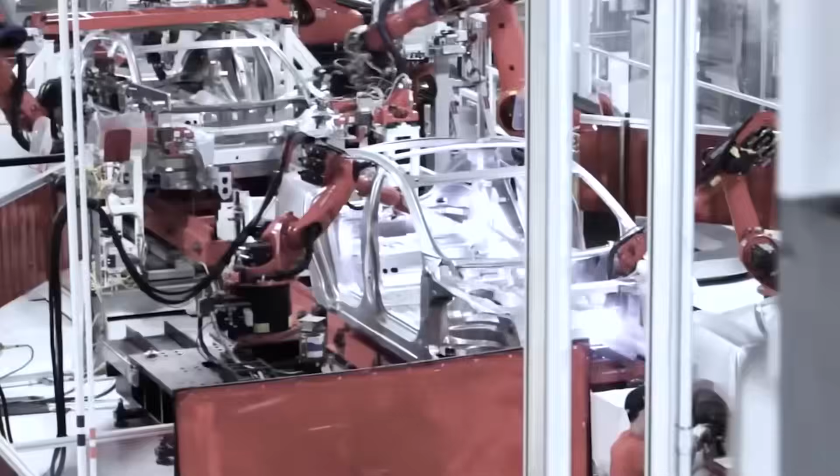It's tough to impress people with a robot. They're already among us, working in factories, saving people in emergencies, defusing bombs, driving cars, helping around the house, and much more.

But what did it look like a few hundred years ago? Yes, back then there were also some kinds of robots, mechanical devices resembling a human or an animal. They played musical instruments, wrote with a quill, danced, roared, and performed other actions that could shock an ordinary person.

Today we're talking about mechanical monks, programmable writing boys, a robot that beat Napoleon Bonaparte and Benjamin Franklin at chess, and other wonders from bygone eras.

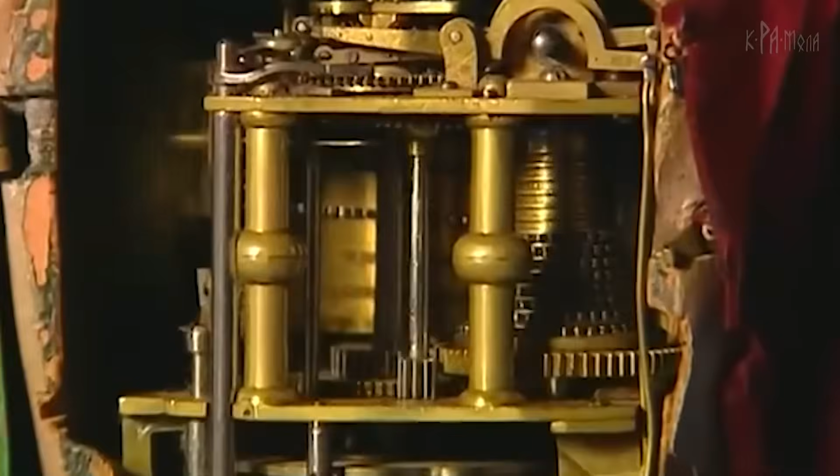In the 18th century, humanity probably began to feel like the master of nature for the first time. One after another, the laws of physics, chemistry, and biology yielded to inquisitive minds, and the forces of water and air were conquered. Everyone thought that just a little more progress, and man would be able, like God, to change the properties of matter and turn the inanimate into the living.

These ideas gave rise to a fashion for automatons, mechanical imitations of humans and animals, capable of mimicking various actions, playing musical instruments, dancing, writing, and drawing. Of course, the range of movements was strictly limited by their design, and it was almost impossible to reprogram the automatons. In any case, it was easier to build a new one.

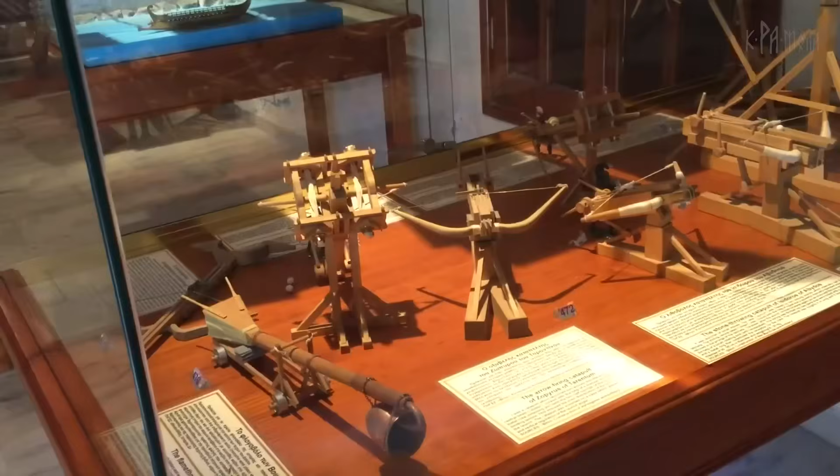Various stories about humanoid robots existed even in ancient Greece, for example, moving statues. But a much simpler mechanism described by Philon of Byzantium, who died in 220 before Christ, looks much more realistic. In the book Pneumatics, he described a device in the form of a woman who held a jug of wine in one hand, and when commanded, by placing a glass in her other hand, she would pour the wine.

King of Spain Felipe II, in 1560, ordered engineer Juanelo Turriano to create a mechanical monk. The monk could cross himself, lift a crucifix, move his lips, as if he was praying for the king. The figure moved on wheels, but for realism, it also had legs that could be seen under the robe.

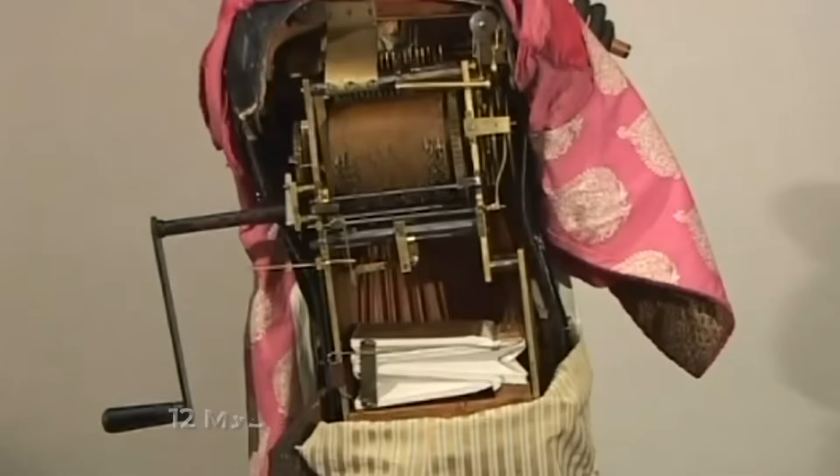In 1737, French inventor Jacques de Vaucanson built a flutist whose repertoire included 12 musical compositions. The holes on the flute were covered in the correct sequence by mechanical fingers, since wooden fingers could not fit tightly against the flute. The craftsman used real human skin.

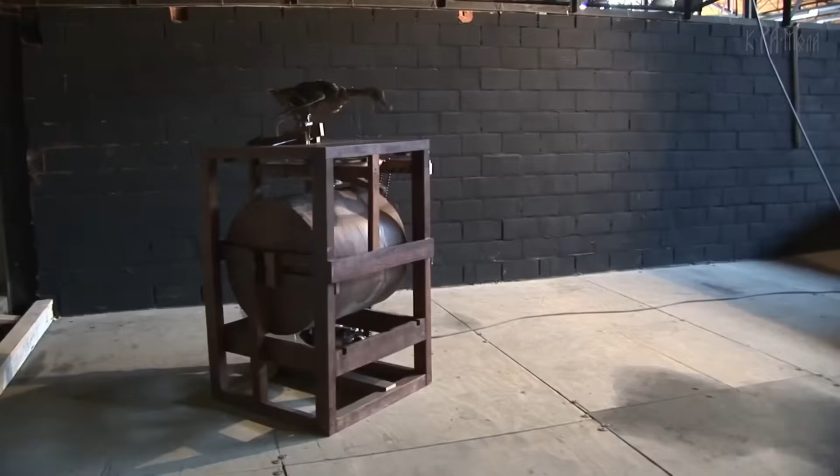Later, Vaucanson designed and assembled a duck from 400 parts, which flapped its wings, ate, digested grain, stirred it, and then defecated. The most important component for building automatons was the eccentric, a disc, or a sector of a disc, mounted on a rotating shaft so that its axis does not coincide with the axis of rotation of the shaft.

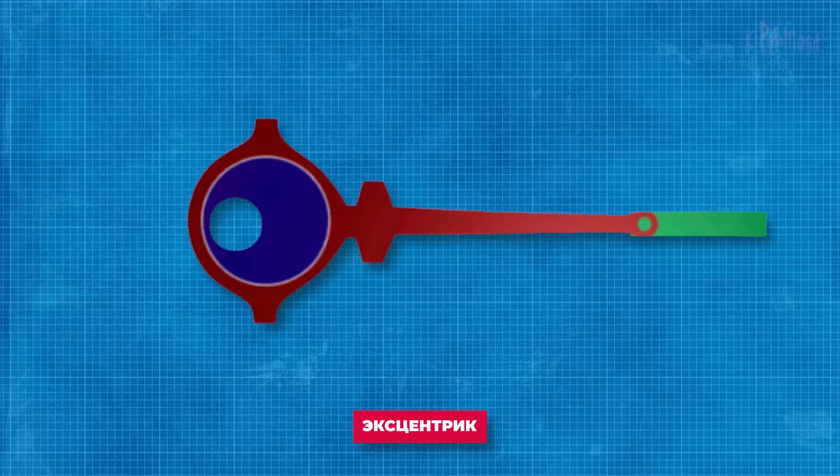This way, rotational motion becomes linear motion. Of course, you can't talk about delicate work without mentioning the Japanese.

This doll is set in motion by strings connected to a mechanism similar to a clockwork. The eccentrics tighten and release the strings, making the doll perform various actions. This doll doesn't just move its arms. It picks up an arrow, draws the bowstring, and releases it. Then it takes a new arrow from the platform, which has changed position during the shot. Meanwhile, the archer artistically moves his head.

In the 1740s, Archbishop Jakob von Dietrichstein built an automaton that was a theater with 200 figures on a single stage, all working at the same time. This is how he depicted the life of an ideal city. Coopers seal barrels, a bull is killed with a hammer. Builders lift planks onto buildings, while the aristocracy watches the common people's hard labor from above.

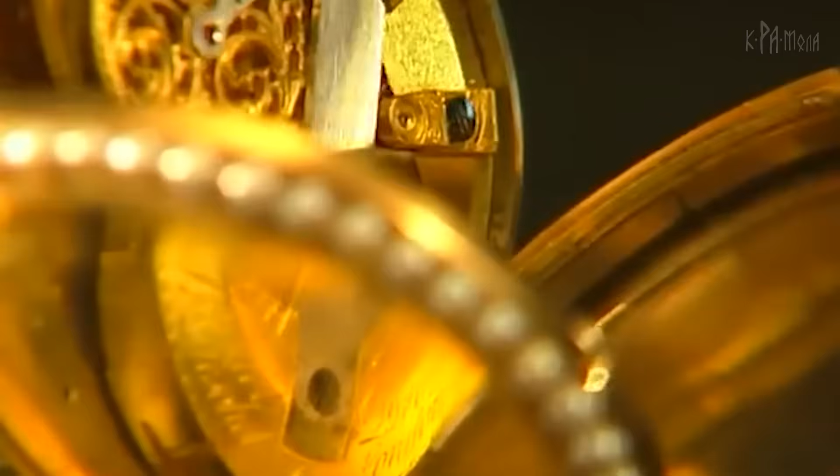Water in the mechanism turns a wheel, which, through several gears, transfers rotation to a drum. The drum contains instructions for each character. In this theater, automatons are closely connected with the art of clockmaking. As you can notice, it was almost always masters of this field who developed moving dolls.

Many tower clocks with figures performing actions have been built around the world. For example, these are Prague's astronomical clocks. They were installed in 1410 and are the oldest working astronomical clocks. In the 17th century, moving figures were added to them: Death, a skeleton with a bell, and a crowing golden rooster.

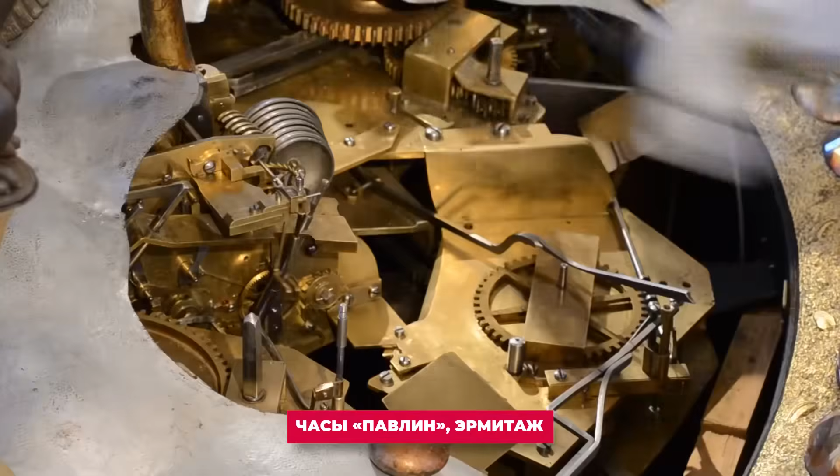The most famous automaton in Russia is the peacock clock, displayed in the Hermitage in St. Petersburg. The clock was made in Great Britain in the 1770s. Every Wednesday, the head of the Clock and Musical Mechanisms Laboratory at the State Hermitage, Mikhail Guriev, winds them up, after which the clock runs for 8 hours.

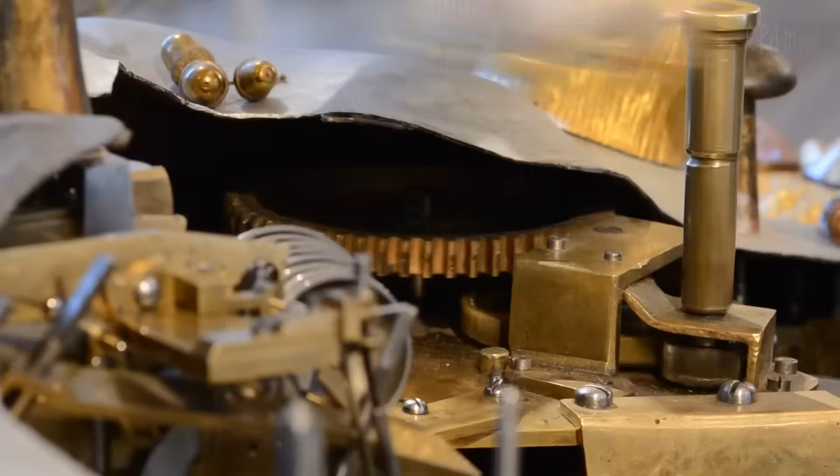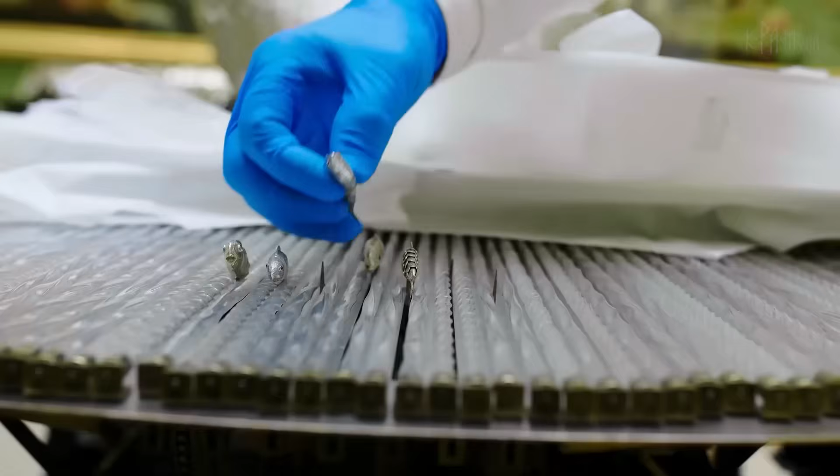Another interesting work of his was a silver swan with a long, flexible neck, searching for food in a silver pond with fish. It runs for 40 seconds at a time, and during that period it seems almost alive, catching and eating a fish while working. Even the water looks real. It is made from rotating glass cylinders with notches of various shapes.

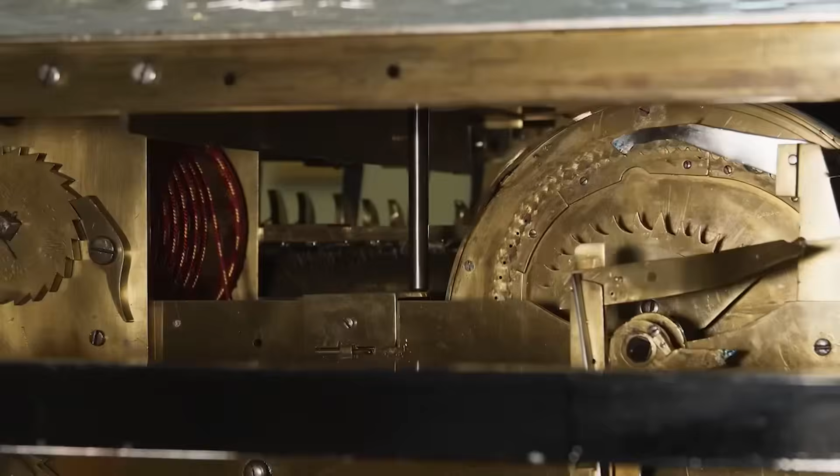In the 18th and 19th centuries, automatons were a form of entertainment for the wealthiest members of society. But these works of art were actually made by much poorer people, craftsmen who produced the components and watchmakers who assembled them. To make more money, they needed to sell more mechanisms and possibly lower the price.

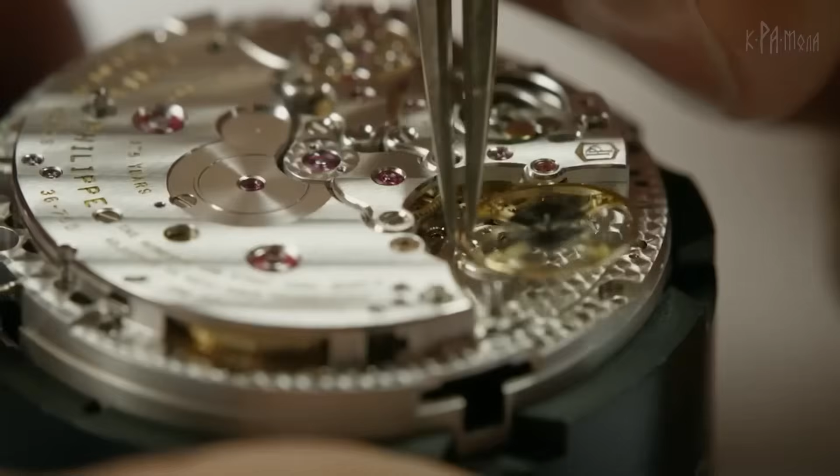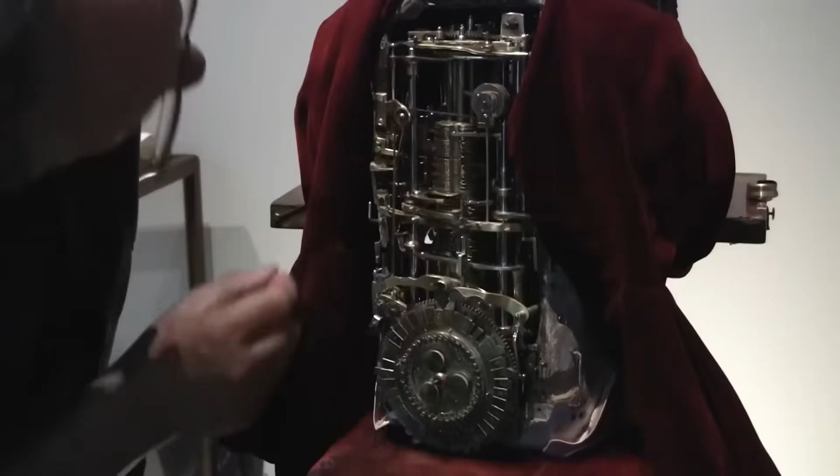The trend toward miniaturizing devices began as early as 300 years ago, with watches becoming smaller and automatons also decreasing in size. Clock mechanisms that 500 years ago took up space in towers were reduced in size to the point where their much more complex versions could fit inside a doll's body, and then into a device the size of a jewelry box. Today, one of the most impressive examples of miniaturization is the thinnest mechanical watches.

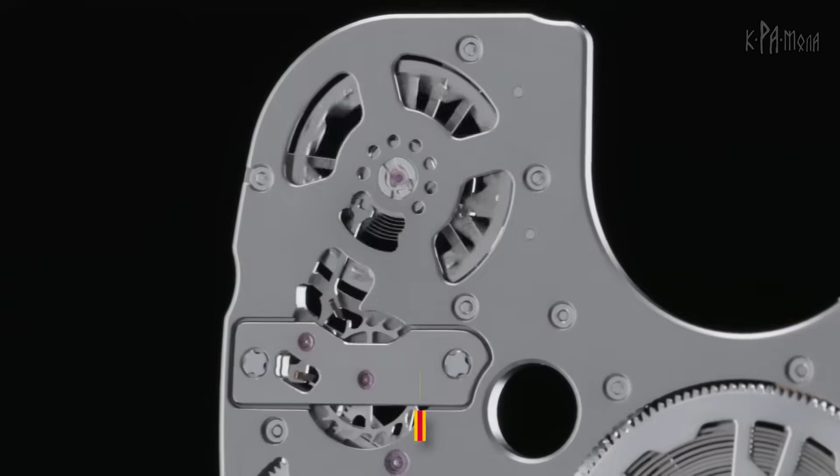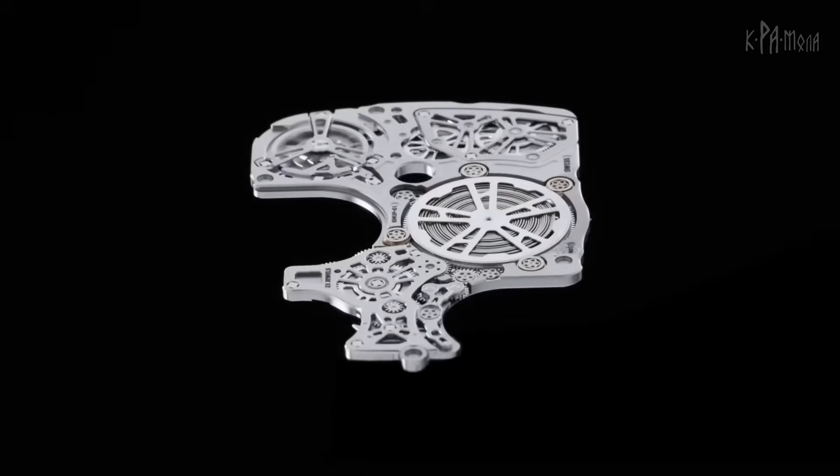Their titanium case measures just 1.75 millimeters thick, about the thickness of 2 bank cards stacked together. That's 0.05 millimeters less than the previous record holder. What else do these watches have besides the Ferrari logo? Well, at the very least, a price tag of around $2 million.

In the wild 1800s, of course, things were a bit different. An example of a miniature automaton is a bird in a cage made in the 1860s.

Another remarkable example is the jeweled laurel tree Easter egg, made by the firm of Carl Fabergé in 1911 at the request of Nicholas II. He gave it to his mother, Maria Fyodorovna. After winding the mechanism, the lid of the tree egg opens and a bird appears, turns around, and sings.

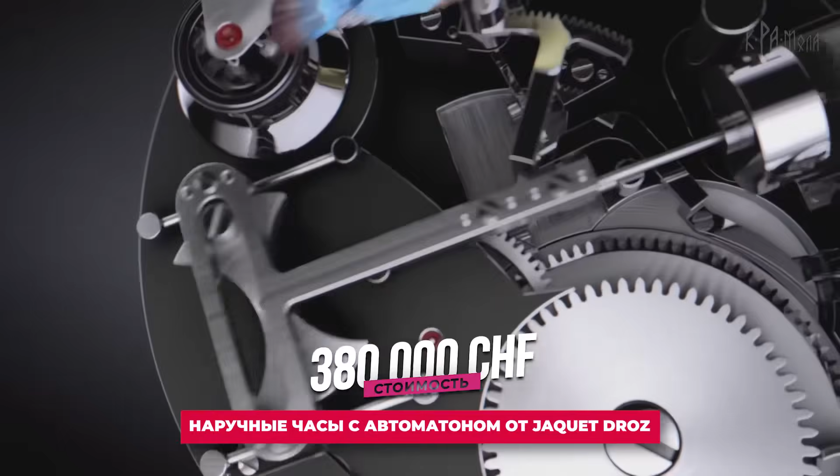By the way, the Jaquet Droz company currently offers a wristwatch with an automaton. These watches with a singing bird cost 380,000 Swiss francs, which is 25.5 million rubles. Jaquet Droz is an old luxury Swiss watch brand.

Its founder, Pierre Jaquet-Droz, became world famous for creating interior clocks and automatons, not electrical devices, but androids mimicking human and animal movements and sounds. In 1784, an automaton was created in the likeness of the Queen of France, Marie Antoinette. The doll moves its eyes, looks around, moves its head, breathes, and plays a musical instrument.

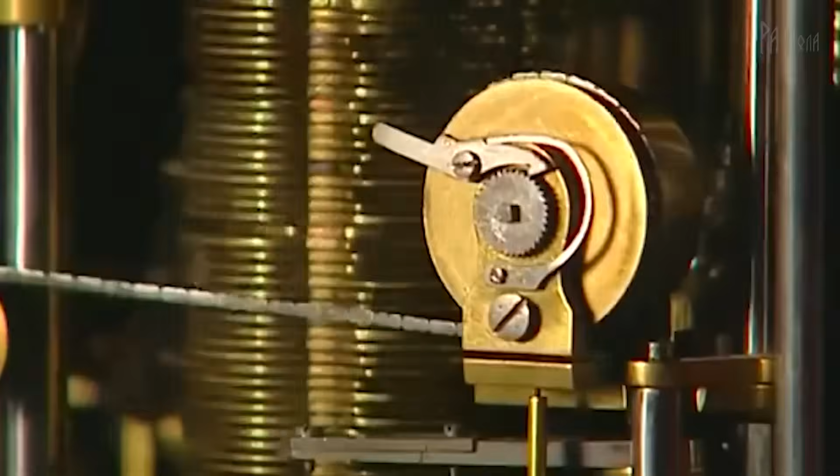The mechanism's realism is enhanced by its additional actions. He squirms in his chair, nods his head, and blows away dust. It's hard to imagine how amazed people then must have been by this robot.

A much more complex mechanism by Jaquet-Droz was called the calligrapher. The device is assembled from 6,000 parts, and the entire mechanism was placed inside the body of a doll. With a pen on paper, the boy carefully writes out the text, and after each letter, with his other hand, he moves the sheet of paper to start the next character, shakes the pen, and dips it into the inkwell. The symbols that the boy writes on the paper are encoded on a round plate in the mechanism.

This automaton is more like an automatic printing press or printer. What's amazing is that the master made it possible to change the text. The disc rotates, and the information about the symbols is transmitted sequentially to the operating mechanism.

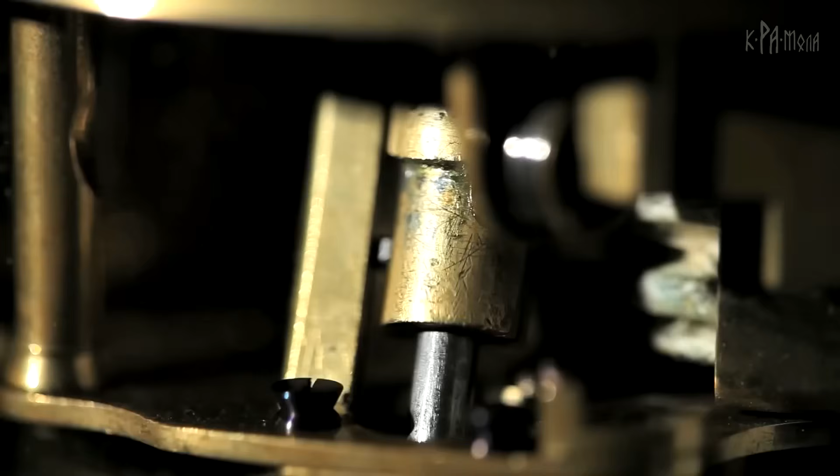Inside the doll, a stack of eccentrics converted the disc's transmitted signal into hand movements. The Swiss watch brand, created by Pierre Jaquet-Droz, still exists and makes these automatons to order, with production taking a year.

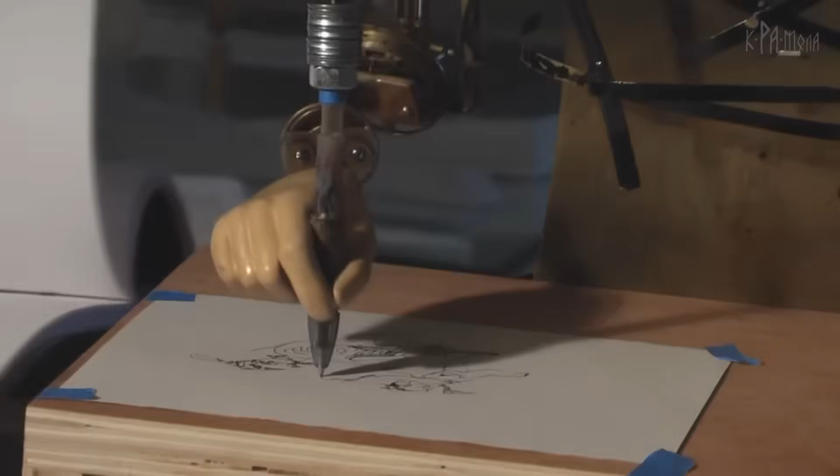In 1810, the English craftsman of Swiss origin, Henry Maillardet, built a drawing writer. He wrote poems in three languages and decorated them beautifully, and also drew images of Cupid in a garden or on the chariot of a Chinese temple ship. The result was pictures like these.

Gaston Decamps, in 1907, assembled the automaton Zulma, the snake charmer. Here we see a girl opening her eyes, breathing, turning her neck, and a moving snake, all accompanied by music.

In 1868, the American mechanic Zadoc Dederick invented the steam man, capable of pulling a load in a cab like three horses harnessed to the same carriage.

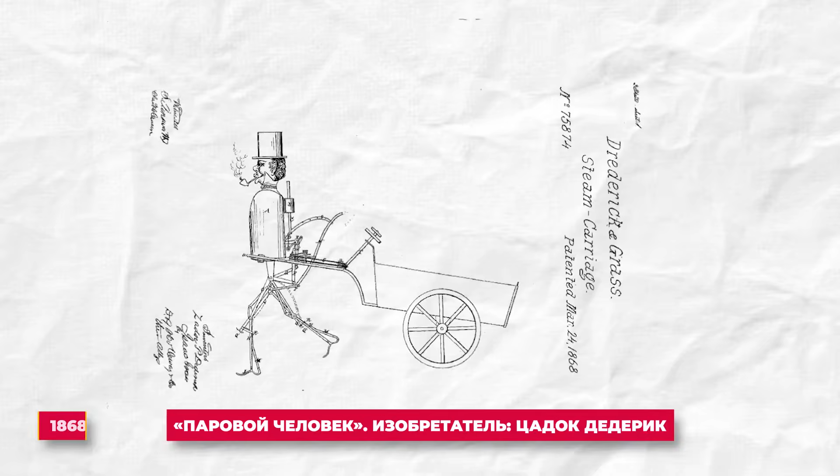Later, inspired by the steam man, the American writer Edward Ellis even wrote a science fiction novel, The Steam Man of the Prairies, in which people encounter a colossal man powered by steam in the American prairies. According to the plot, this steam man was constructed by a teenage boy who uses it to pull his carriage during various adventures.

Automatons could be used to make money not only by selling them, but also by deceiving large numbers of people. One automaton stands out from previous mechanisms, able to imitate humans, think, analyze, and make decisions.

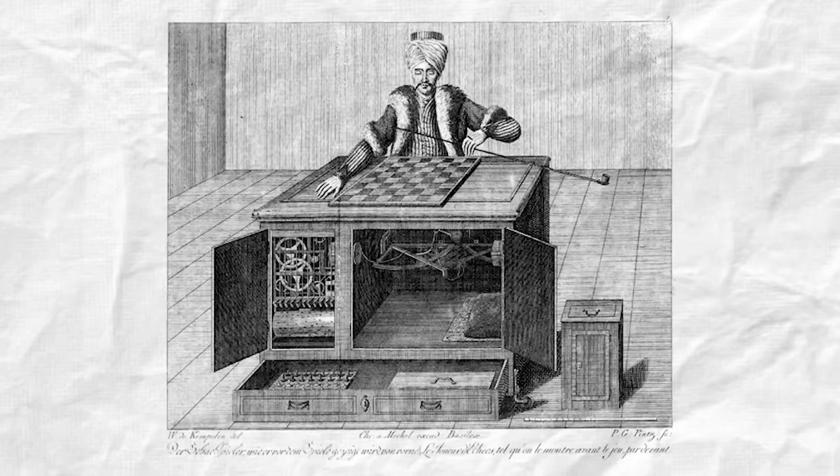This automatic chess machine was called the Mechanical Turk, created by the Hungarian inventor Wolfgang von Kempelen in the second half of the 18th century. On the outside, the machine looked like a wooden sculpture, consisting of a life-sized mannequin attached to a wooden cabinet. According to its creator, the Mechanical Turk was capable of playing chess on par with a human and even beating them. Was it possible, based on 18th century technology, to create a functioning artificial intelligence?

Let's not build up suspense, of course not. But that doesn't make the Mechanical Turk any less of an interesting phenomenon.

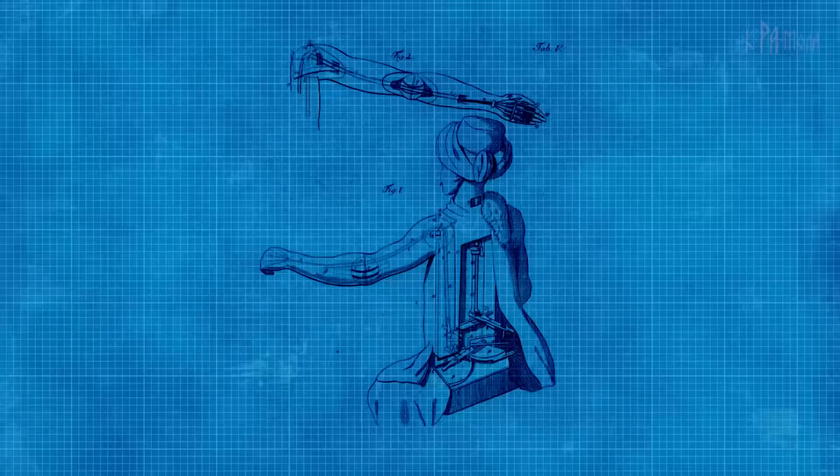The main advantage of the automaton was that a person inside controlled the Turk's hand, not just moving it, but actually grasping the pieces and moving them, as well as understanding where each piece was located. Thanks to the magnets on the underside of the main chessboard, this is an excellent example of an early manipulator.

At the show's start, people saw the table's mechanism and empty shelves lit by a candle. The doors were closed, and the game began. During the game, the mannequin's left hand would pick up the pieces and move them across the chessboard, while its head seemed to follow the moves with its gaze.

The automaton would announce a check to the king with a triple nod of its head. If the opponent tried to cheat, for example by making an incorrect move, the Turk would stop playing and remain still until the mistake was corrected. Every 20 moves, von Kempelen would announce a break and wind up the mechanism with a key.

News about the first machine capable of matching a human and even surpassing human intelligence spread everywhere. After his first performance before the Empress of Austria, von Kempelen was literally flooded with invitations from other members of the royal family, nobility, and ministers.

Von Kempelen, together with his chess machine, set out on a journey across Europe. During this journey, the Mechanical Turk faced various opponents, almost always defeating them each time. Von Kempelen readily demonstrated the Turk's mechanical construction, but he never allowed anyone to touch anything, making excuses about the extreme fragility of the mechanism and the delicacy of its settings.

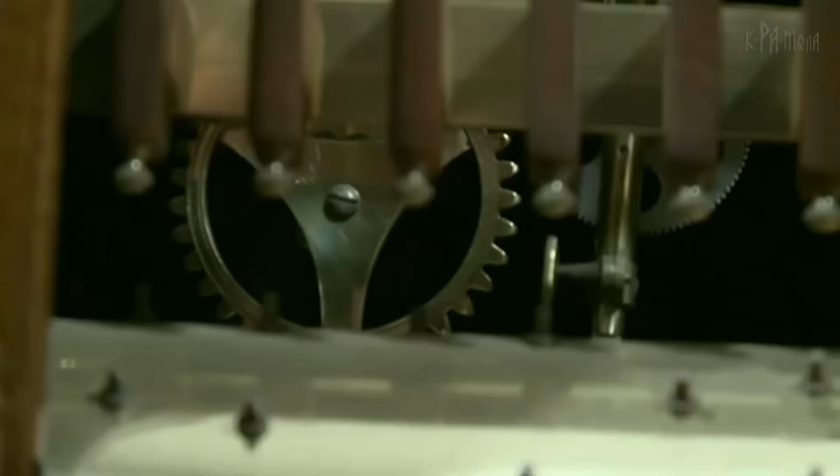When Von Kempelen and later Maelzel opened different machine doors during the demonstration, in such a position, the operator could not observe the chessboard in any way. However, powerful magnets were installed under the base of the heavy pieces placed on the chessboard. Inside the box, under each square, there was a metal ball attached to a vertically stretched string. When a piece was lifted, the ball would fall, signaling its movement. As soon as the piece was placed on a new square, the magnet would attract the corresponding ball. The player controlled the mannequin's hand through a complex system of levers and cables, and also manipulated the Turk's head.

Unfortunately, in 1854, the original mechanical Turk was destroyed in a museum fire. Now, a replica is on display there, connected to a computer, and it can actually play chess. The very name of the device has, in a way, become a household term. For example, in 2005, the Amazon Mechanical Turk online platform was created, which allows individuals and entrepreneurs to hire people to solve tasks that computers are currently unable to handle.

There is this unusual automaton made by the Bulgari manufactory, belonging to the rarest caste of automatons that have almost completely disappeared from watchmaking. The figurine of the Venetian player throws dice in a random order when the minute repeater mechanism is activated. A truly unique, unparalleled set consists of a wristwatch and a matching table doll.

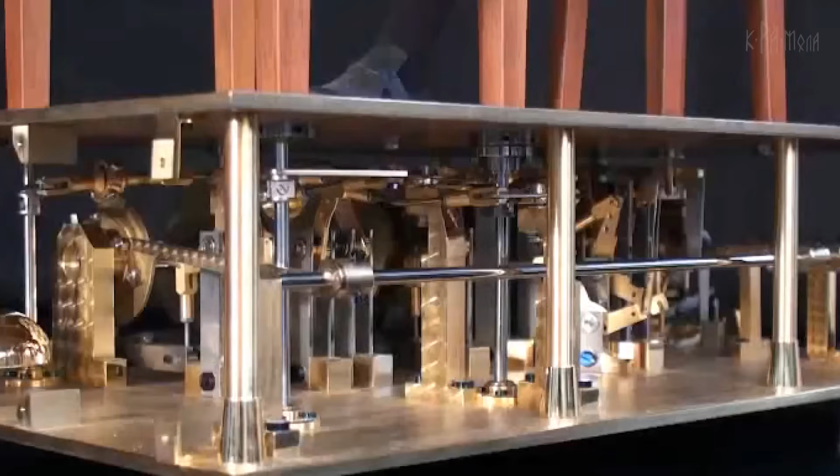When technological progress moved forward, automatons were forgotten. Their place ended up in museums, and in rare cases, they entertained people at various events. Fortune teller automatons were popular at 19th and 20th century fairs. They gave out predictions of fate on pieces of paper, pointed to cards or runes. Usually they looked like mechanical gypsy women, but there were other versions as well.

These wind-up robots were made to appear in the famous British television series Doctor Who. According to the plot, the automatons from the 51st century tried to repair a spaceship using the organs of dead crew members, as well as living people.

An automaton in the form of a severed human hand is on display at the Swiss Watch Museum. It is capable of writing not only individual words, but also entire sentences.

The Undertaker's cabinet is an unusual automaton that depicts a full-fledged, frightening scene. When the coffin is placed in position, a skeleton's head appears behind it. The corpse rises from the coffin and turns its head toward the viewer. Then, the skeleton hides, and its place is taken by the devil.

A tiger devouring a white man in the form of a British soldier belonged to one of the rulers of India in the 18th century. The automaton was created as a symbol of protest against British rule.

In 2016, you could see a figure of Donald Trump with glowing red eyes on the streets of America, predicting the future of the country.

Look into my crystal ball, and you will see the future of America. I see huge investments in a modern, high-speed rail system, very advanced, very fast. And we're using the new trains to deport 11 million illegal Mexicans. And by the way, I love Mexicans. I love putting them on trains like cattle. I build the best deportation trains. Believe me, my trains are the best.